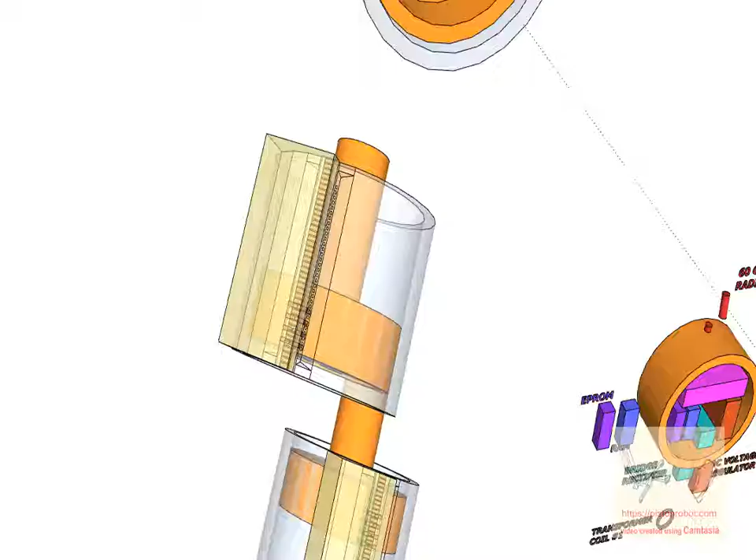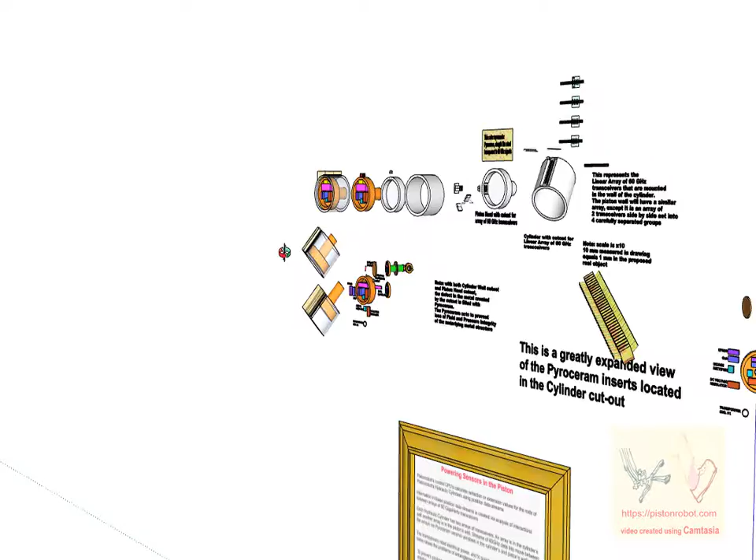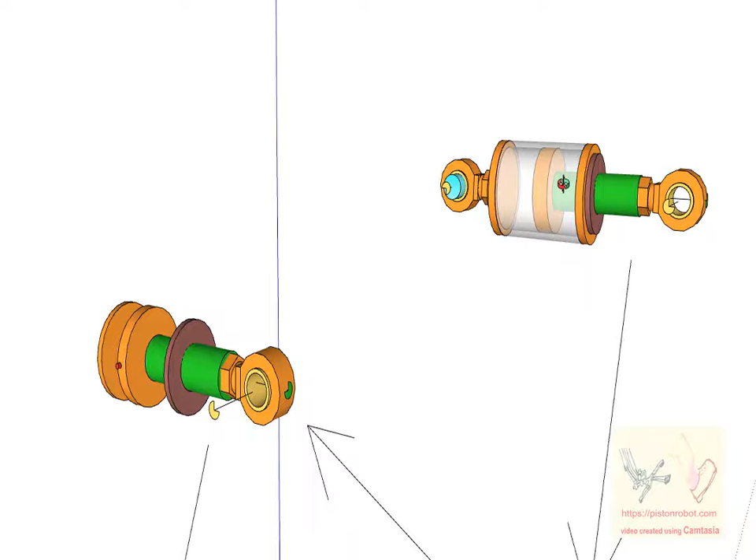So there's another thing that needs to be discussed here, and that is a situation where the robot is off. It's sleeping quietly, not doing anything. There's no electrical power anywhere. And it gets the message to get itself going, so it flips its switch, turns on its energy source, begins to create electrical energy, and starts waking up all of its central processing. Then central processing begins the process of waking up these hydraulic cylinders with respect to their ability to...

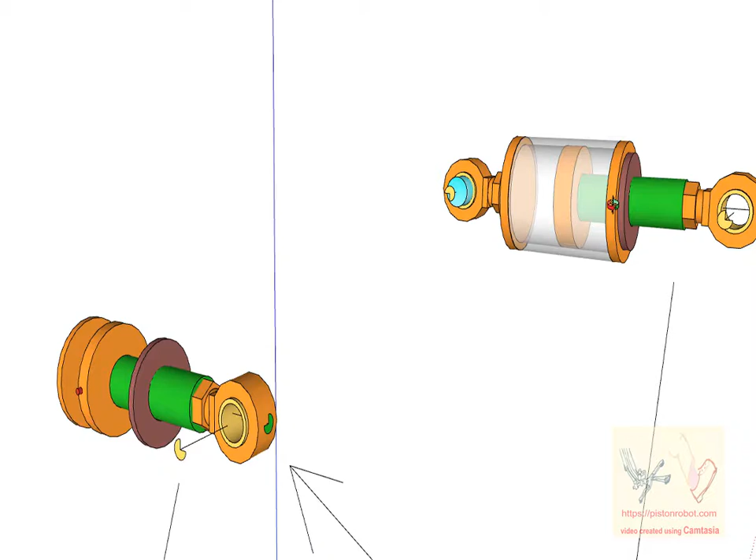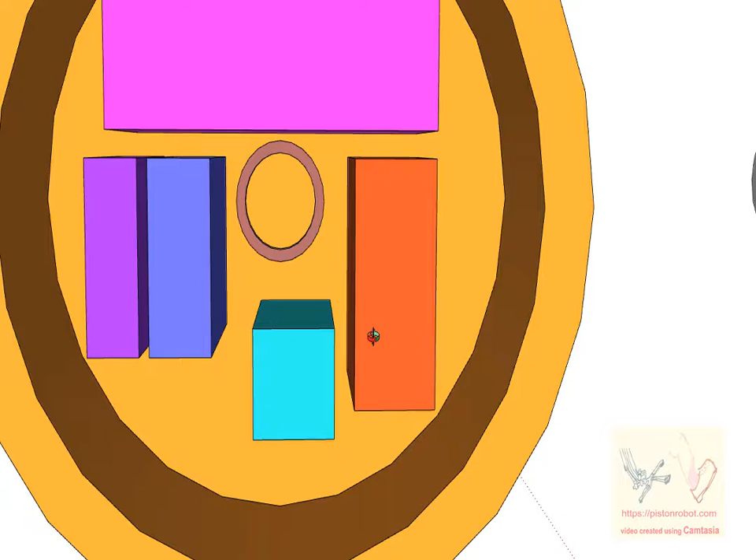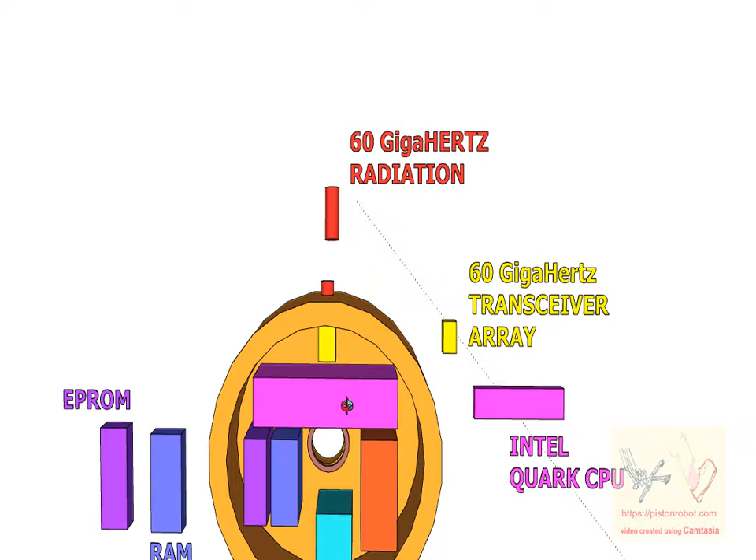generate data transmission between the hydraulic cylinder and the central processing unit. So the central processing unit will send voltage to this coil, and that coil will send voltage to that coil, and that coil will take the voltage that it's creating, because it's on that rod, and send that voltage to the bridge wave rectifier, and that bridge wave rectifier will bring the voltage up into a decent form of DC voltage, and that voltage will be conditioned if it needs to be, and finally sent over to the quark, and the quark will wake itself up and say, whoa, the robot has been turned on. And the quark will say, okay, and send a message to this 60 gigahertz transceiver and say to it, hey, piston transceiver, wake up, we're on.

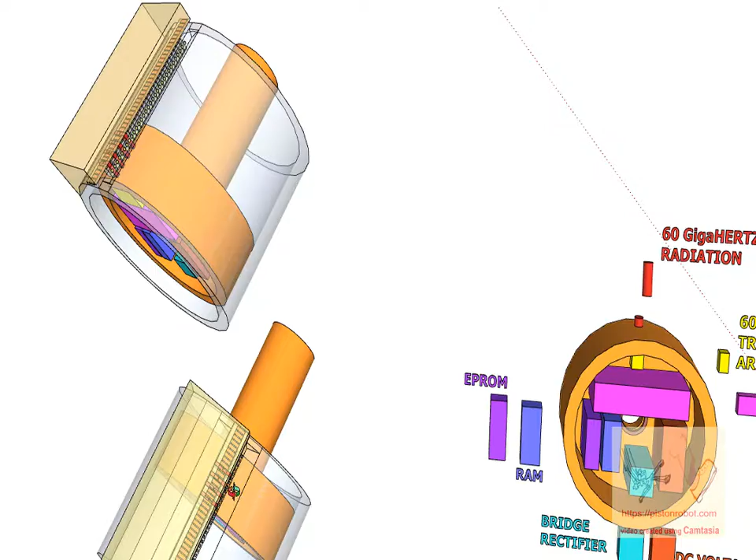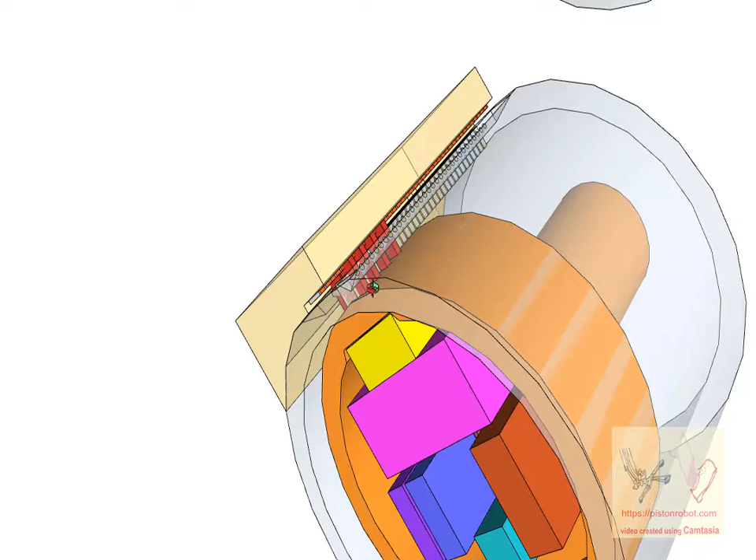And really, as you can see, in the real robot there's actually 1, 2, 3, 4, 5, 6, 7 — there's 8 in this drawing. I don't know that there's enough power to send 8, but there may be 4.

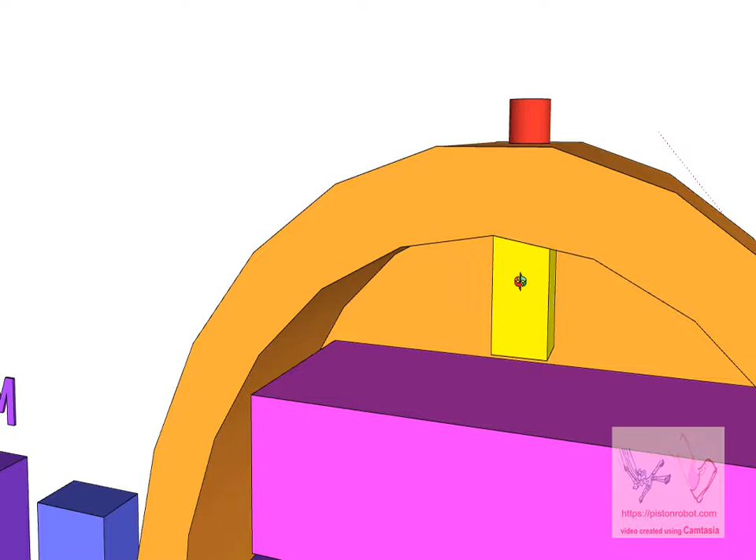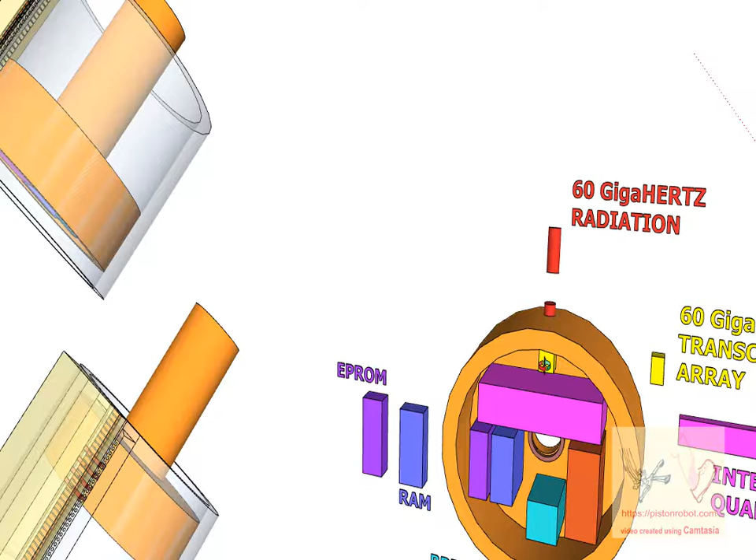So this quark, in a sequential fashion, will wake up these 60 gigahertz transceivers and tell them, get yourself going. Basically, electrical energy will go from the quark. The quark will control electrical energy, send it to the transceiver. The transceiver will wake up and send data to the quark. The quark will send data to the transceiver. The transceiver will send data to the quark until everybody's happy and it's functioning. At this point, the 60 gigahertz transceiver that is in the piston is a fully functional data transmission reception device. It is available to send and receive data because that is one of its original capabilities. So it's sitting here awake, ready to go, and capable of functioning as a data transmission reception device.

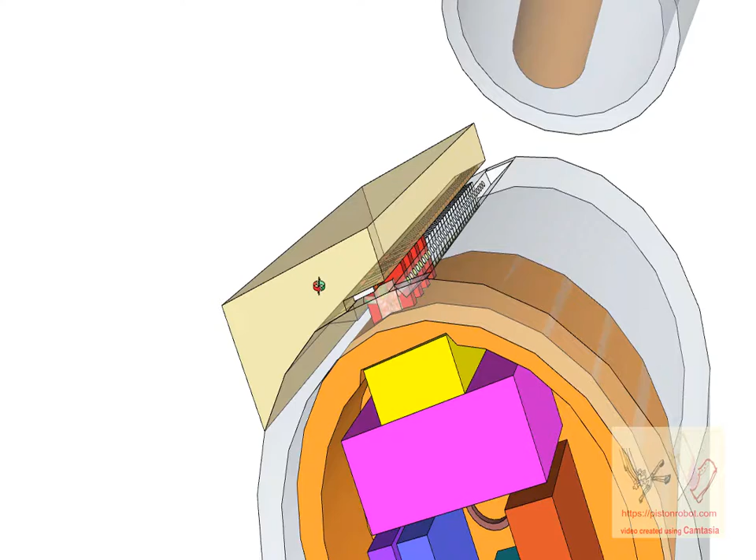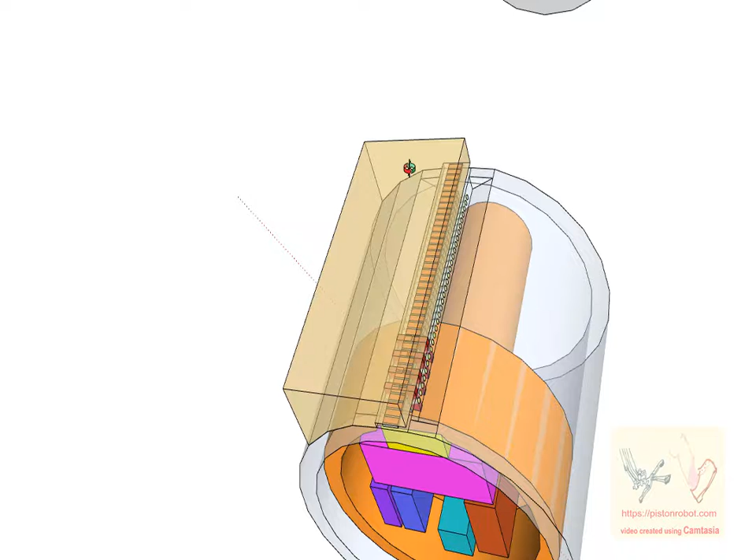That exact same wake-up sequence would have also been sent to this yellow colored box that is the local area control processing system for the linear array of transceivers outside of the cylinder wall. This block of space will also have in it a quark and some RAM and EPROM and whatever it needs to receive electrical power, realize that the robot has been waked up, realize that it needs to wake itself up, and then it will turn and wake up all of its little processors, and run through its wake-up sequence and be sure everybody's happy and ready.

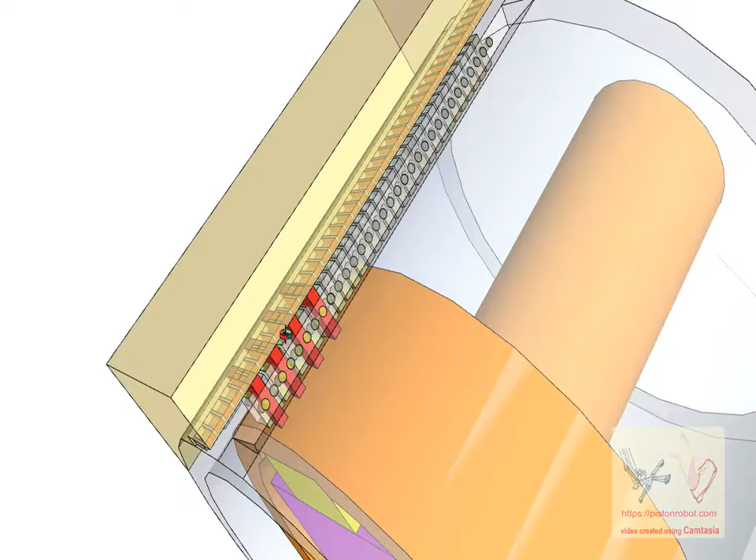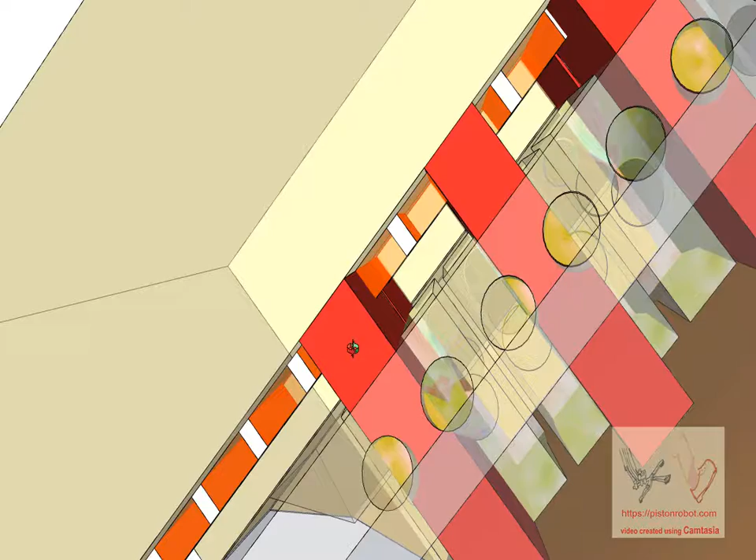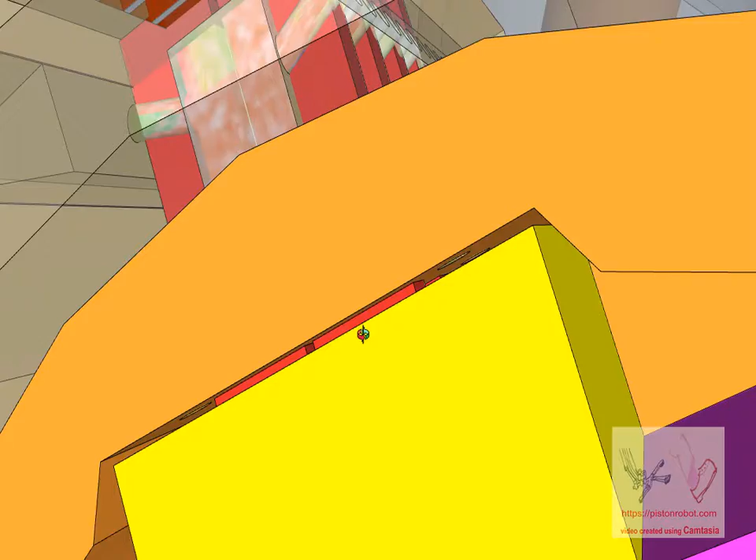Then it will begin to send out a little 'hello, is there anybody there' type of data event, where this device is acting in its original capability as a 60 gigahertz data transmission reception device. Hello, anybody there? Hello, anybody there? And at one point, there's going to be one of these in this array on the wall of the cylinder that is going to send a radio frequency data transmission signal down through the piston wall to a 60 gigahertz transceiver that is awake and functioning inside the piston, and that one will say, yes, yes, I'm here, I'm awake.

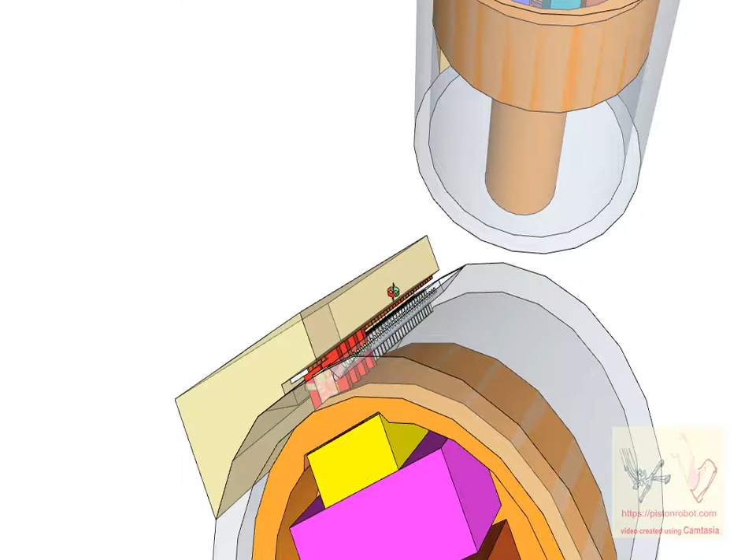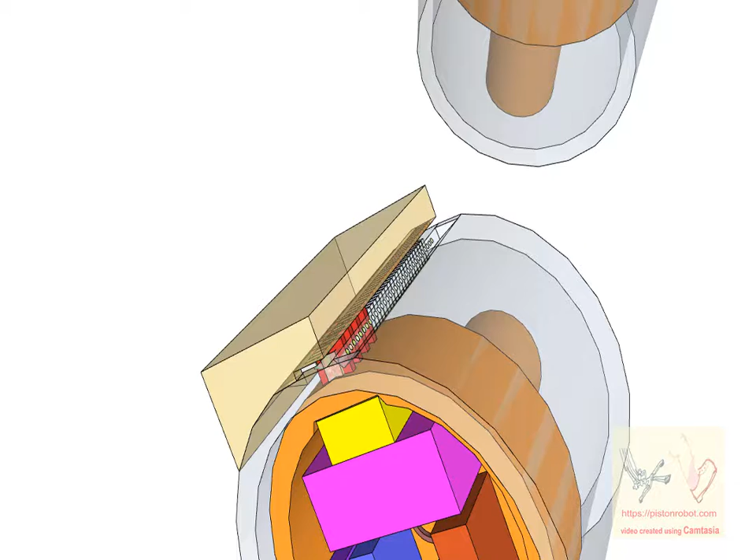And at this point, this system can be capable of sending status information of how it is available and ready to function to the central processing unit. All of this activity is data processing. It has nothing to do with the sensing of position — it has to do with everybody waking up and getting ready. And when everybody is waked up and ready, and they've done their little tests and they're in a position where they think they can do their work, they send a note to the robot central processing unit in the head and say, this particular hydraulic cylinder is ready to give you information.

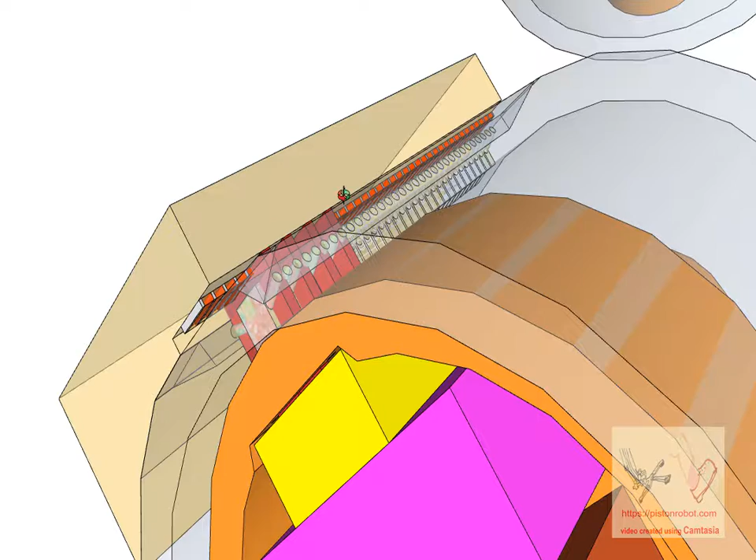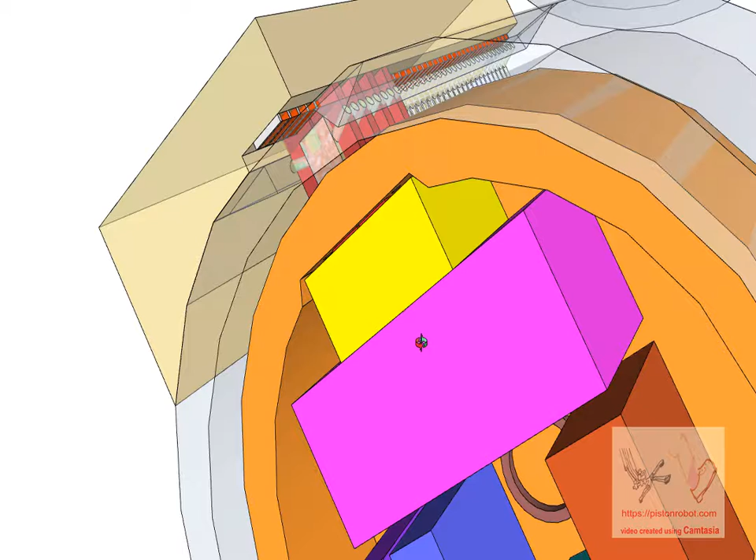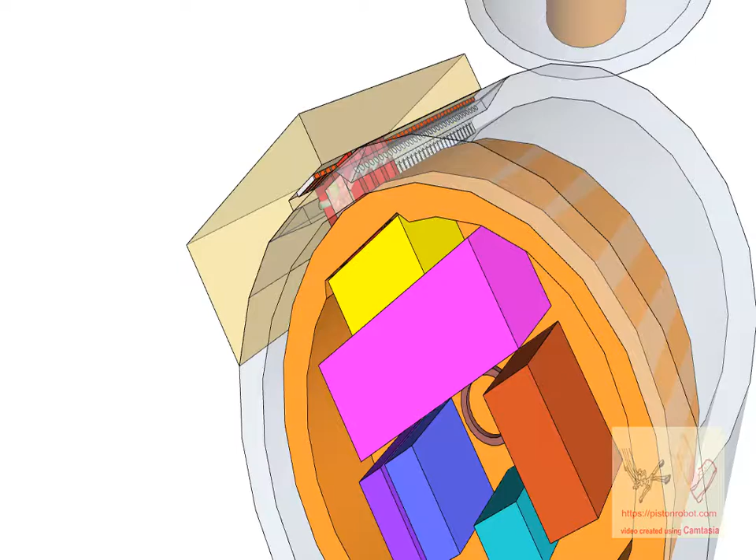And the central processing unit will then send data requests down. These data requests will go to this yellow colored block, which will then send these as data requests through the block, through the 60 gigahertz transceiver in the piston head, and to this quark. At this point, the 60 gigahertz transceiver inside the piston head is serving only as a data relay channel, so that the central processing unit of the robot is able to communicate with the 60 gigahertz transceivers of the cylinder. And when all of that interaction and link up is proper, then finally the central processing unit of the robot can send data signals to this quark to say, I, the central processing unit of the robot, am now ready to ask about and receive position information about the position of this piston inside of this cylinder.

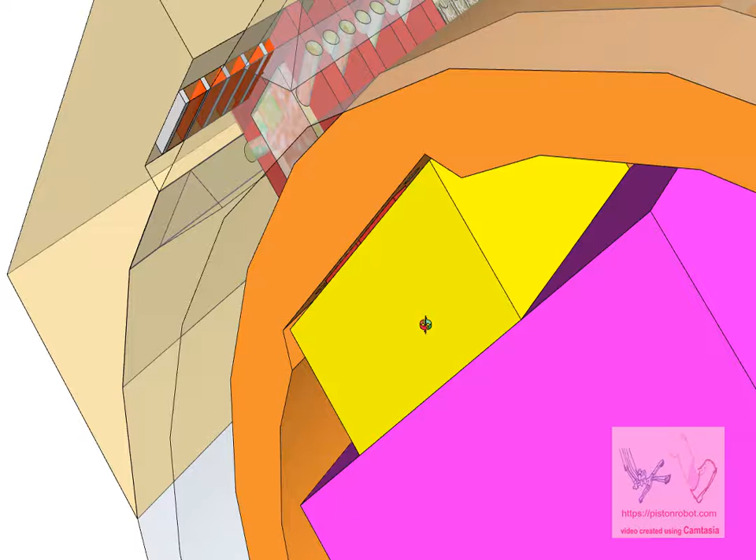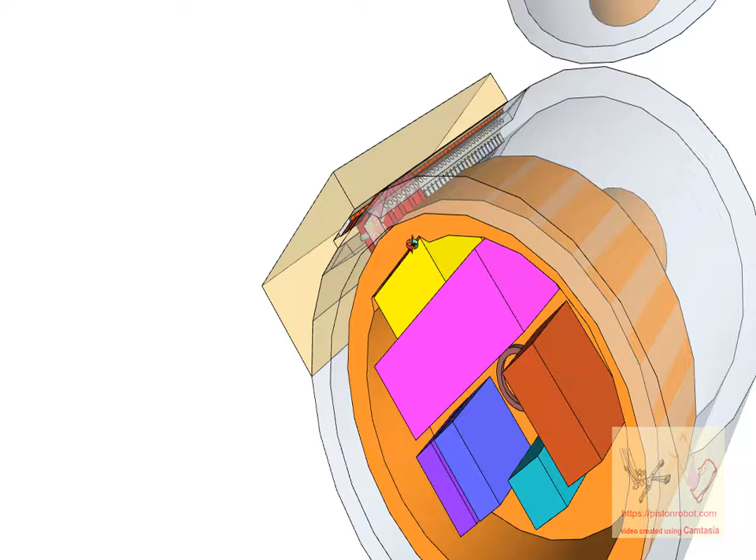So not only the array of 60 gigahertz transceivers in the cylinder wall and all the parts on the cylinder wall, but also the array of 60 gigahertz transceivers inside the piston and all of the processing items inside the piston head — all of these can act for the purpose of moving data back and forth and doing communications. And they actually have the ability to have two jobs. One job is communicating with the central processing unit of the robot. The other job they have is communicating data for the purpose of establishing the position of the piston head.